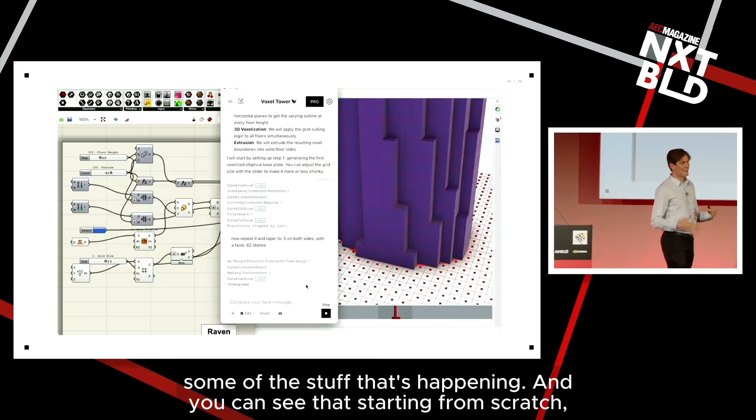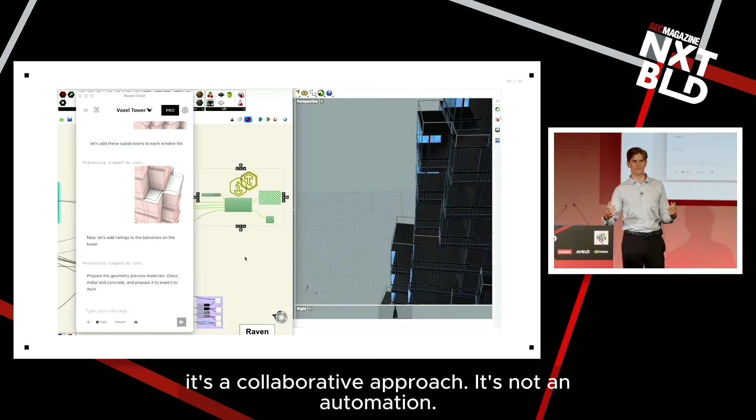We saw it earlier in the presentation that Bentley did. But here I have the same video again, just a little bit slower so we can look at some of the stuff that's happening. You can see that starting from scratch, you can create a Grasshopper model and then have that sketch and your prompting be in context as you develop this parametric model together with Raven. So it's a collaborative approach, not an automation. That's what Raven does.

And then you can push it, for example, to Bentley. Raven is your AI system for Grasshopper and Rhino, because we think that the tools that we've been building for 20 years are valuable. They have a lot of knowledge built into them. They already perform all of the actions that you need them to do. And what you need is to bring them all together, solve the interfaces, and deploy AI that's native across that suite instead of rebuilding something from scratch.

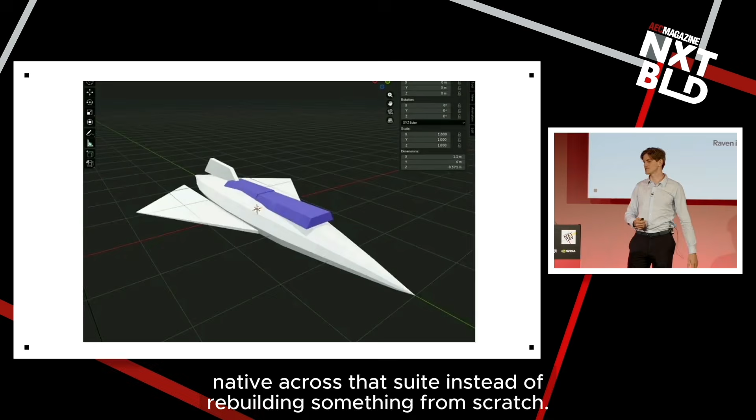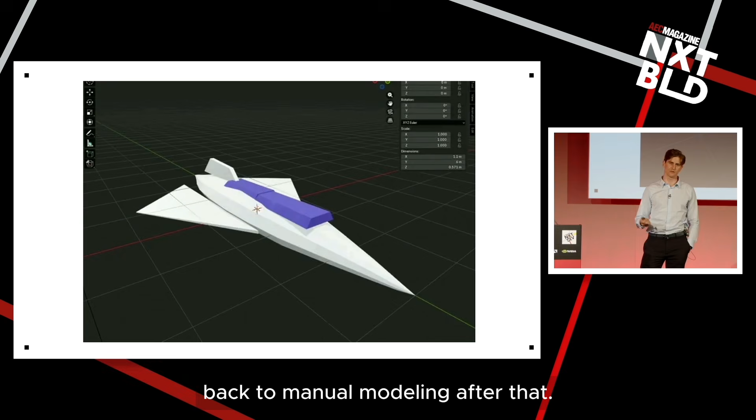Also, instead of doing something like an MCP that throws some blocks into your CAD, like a Rhino file—if you build a Rhino file with an MCP, you have sort of loose objects and you're back to manual modeling after that. One of the things that we really love about the Grasshopper platform that makes it attractive, even if you are not currently a parametric designer, is the structure that it brings into CAD models.

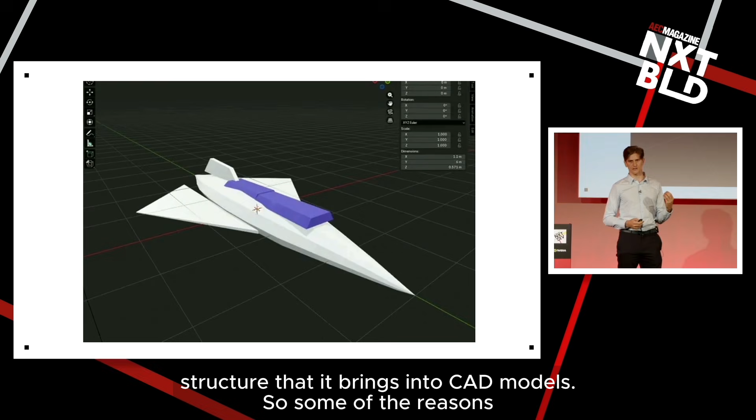So some of the reasons why it's a good idea to build on top of the existing systems is that you can use a lot of the things that they already bring. The node-based structure of Grasshopper is actually the perfect way to author a 3D model for AI, because the node abstracts away all sorts of functions. You can make a CAD model, you can have a simulation in there, you can call foreign APIs, and at the same time, they all work through inputs and outputs, and they are very well structured.

So if you build a model using Raven and Grasshopper, you get a structured 3D model that can still be just as complex as your normal Rhino model, but it's actually way easier to collaborate on with an AI model to fix things. If you have an MCP build you a building and you want to take out a floor, you're back to a manual edit, and in Grasshopper, it's one little slider move. So this very thoroughly structured data, the thing that makes Grasshopper a pain to use or to learn, is exactly the right place to be if you want to work with an AI model.

And of course, you can abstract away complexity. You can have different levels to navigate through the graph. So working on big Grasshopper graphs is actually really good for models and for humans to collaborate on.

The thing is, if you don't rebuild the entire CAD suite, it comes with way more depth. So instead of just giving you an early stage design tool with AI, we can give you an AI tool that can do all of the things that you were doing already anyway. So you can build geometry with Raven in Rhino, but you can also run your analysis tools and connect it to all the other things that already exist. So you are not stuck in a shallow AI CAD suite, but you really get the full depth of the McNeel ecosystem.

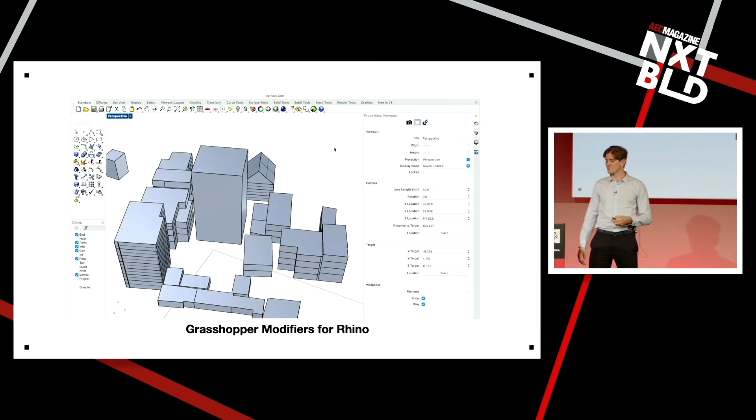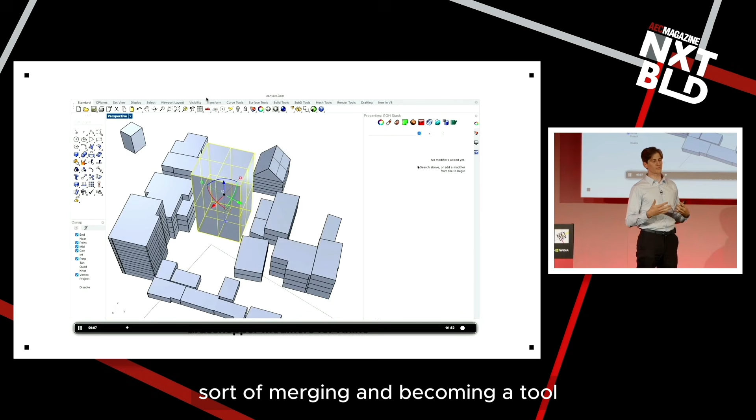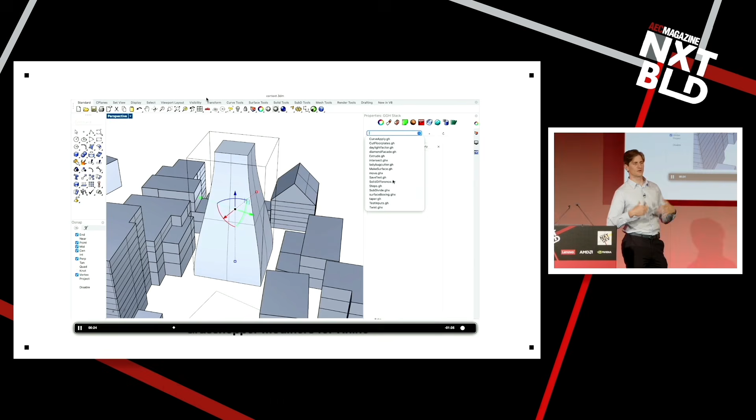This is an open source project, but it's pointing towards a direction where we see AI and design sort of merging, becoming a tool where you can have direct interaction with your CAD model here, and then you can apply a bit of logic to it. In this case, it's just a taper. But then you can take that taper and you can add another script that cuts it into floor plates. You can have Raven write complex scripts in the background, let you interact with the entire suite of Grasshopper plugins while you are sitting in Rhino with direct interaction on the tools that you already know.

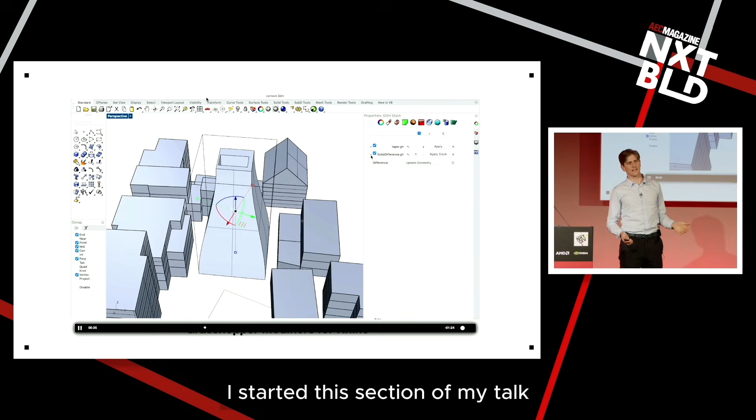I started this section of my talk talking about how do we bring design tools to designers that are like AI native.

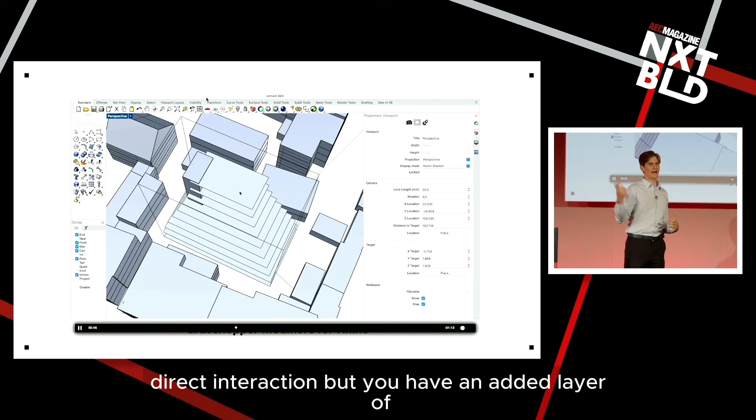And we really think that this way, where you get easy direct interaction, but you have an added layer that gives you basically access to the entire world of coding and plugins and so on, bringing that right into the UI that you're familiar with, into the files that you already have.

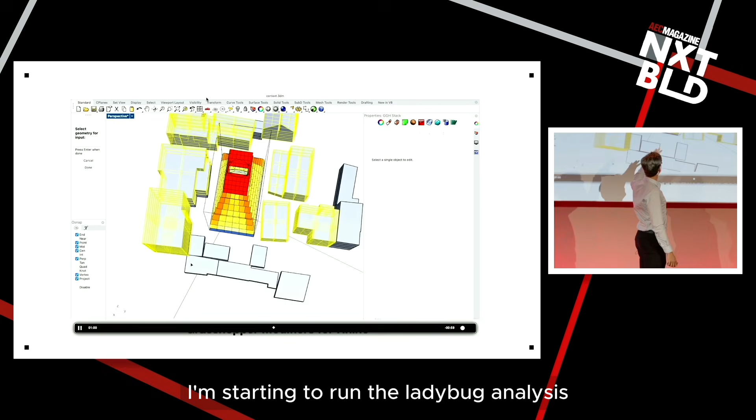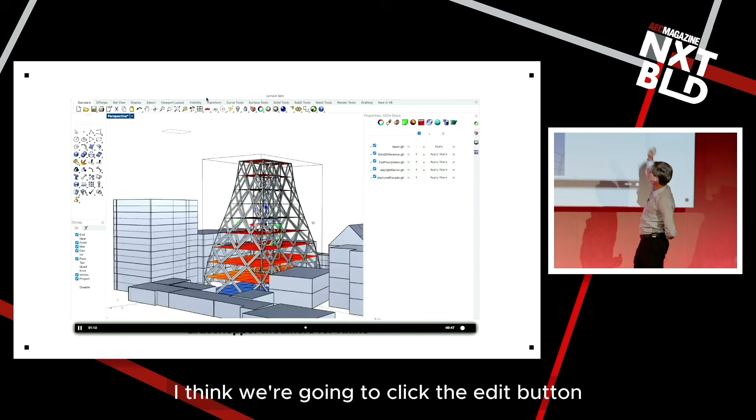Here you can see now I'm starting to run a Ladybug analysis based on the context, cutting it into floor plates, and everything still just exposes the simple UI. Now, just in a moment, we're going to click the edit button, and that will open up the Grasshopper file that is behind this. So this all still runs native Grasshopper. It's just a different kind of interaction for that native Grasshopper.

And if you click on edit, it will open up a Grasshopper file, and you're back to your ground truth, right? The tools that you already trust. So this is how we think the future of design will look like. You're grounded in the tools that you know. You can draw from all these different parts, right?

Everything is sort of an interconnected world that is not on a linear scale where you export at the end of your process, but instead you can draw from the previous scripts that you have, run analysis, interact with autonomous agents, and they really center you as a designer within all of that context. You're not waiting to hand off your model to run a simulation and then never look at the results again, but instead in the design process you can bring all of that in way earlier and keep it interconnected. And these hand-offs are kind of falling away.

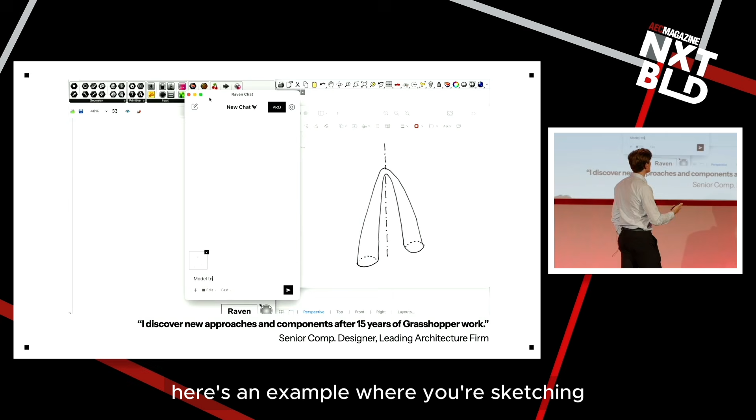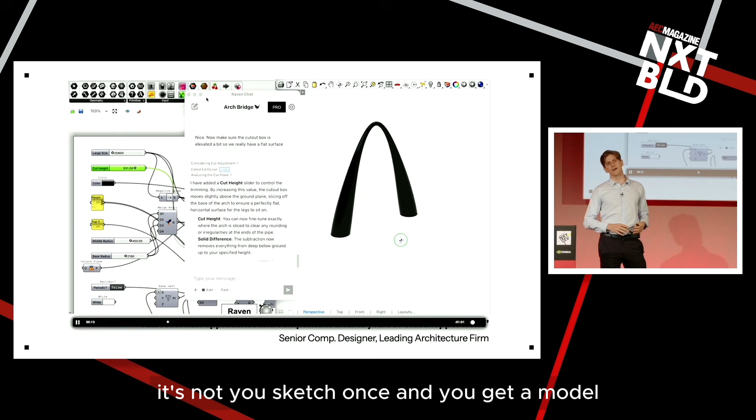So what does that look like? Here's an example where you're sketching and then iterating alongside the AI model to make a bridge model. And the reason why I like this example is it's not that you sketch once and get a model. It's also not that you prompt once and get a model, or you get a result the AI made and then try ten rounds to get rid of this one little thing you didn't like.

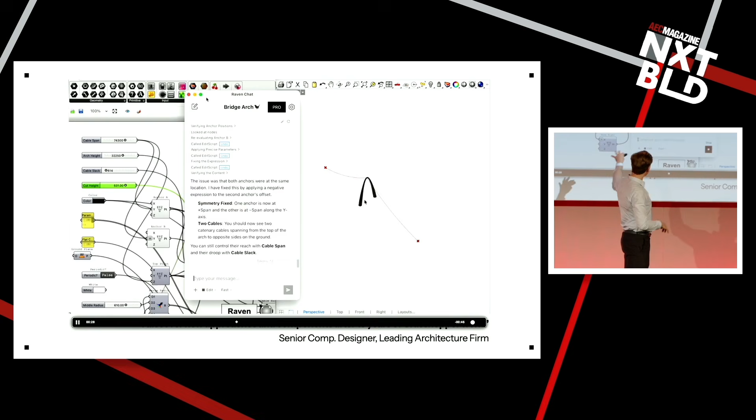But instead, it's really interactive. You can sketch, you can prompt, and you can go in and change the sliders yourself or add graphical components and logic that you know you want. So it's a really fully fledged interaction between you and the model, getting to the point that you're trying to go to. It's not about one-prompt automation, right? It's about this iterative process that can be way faster and way better informed early on.

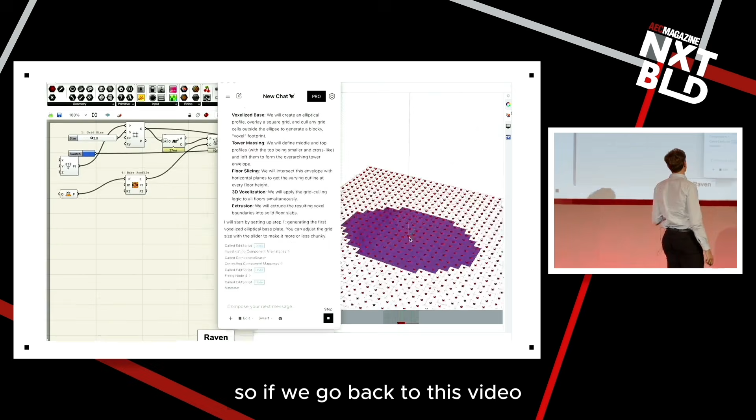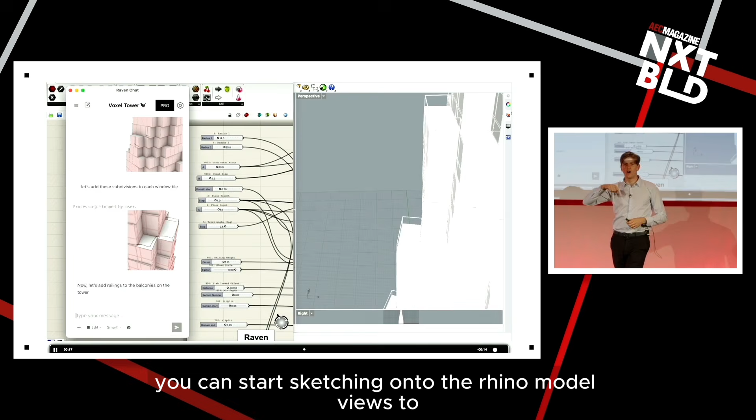Okay, very cool. So we have design tools. They center the designer, they let you really explore and have a lot of context early on in the design process. But how do you make them reliable?

Well, the reason why you can make reliable tools with AI is because you don't just rely on the AI model. Instead, you rely on the tools, like the Rhino CAD kernel, that actually execute the plan, right? Which means in our case we can run any kind of simulation software you already use. We can rely on all the software you already have and just have the AI act on top of it, which means the things you're trusting are the same tools as before. You're just chaining them together and operating across them faster.

And by all the tools you already use, I mean all the tools that you already use. So through the Rhino Grasshopper platform, Raven can already connect you to tools like Ladybug Tools and Karamba for structural analysis, but also Rhino Inside Revit, right? Rhino Inside Revit, you might already use that as this one-way piping to bring things you build in Rhino into Revit, but with Raven, it becomes way easier to use and sort of natural, part of this entire workflow. So as we're sketching out this building from earlier, we can already bring that into Revit, into a native BIM model, all within the Grasshopper canvas.

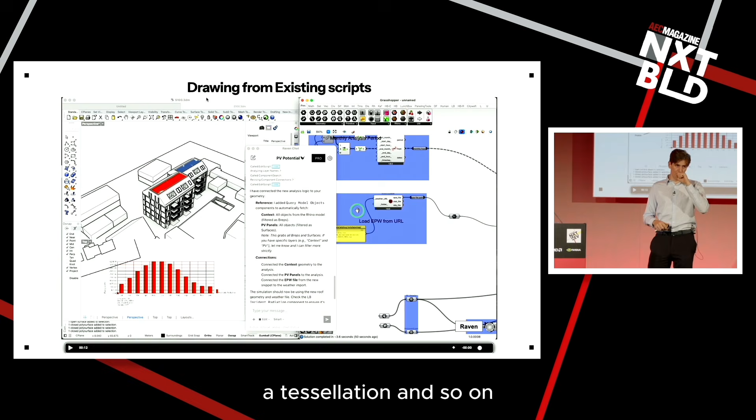Another thing, the compounding knowledge that we spoke about this morning is drawing from past scripts. How many times have you guys or someone on your team done sunlight analysis, done a tessellation and so on, and then you never use those scripts again because they're in Grasshopper or because nobody can understand them or you don't know where they are? We are really betting big on this shared hub of knowledge that AI agents can interoperate in, draw from, and really compound also for your firm.

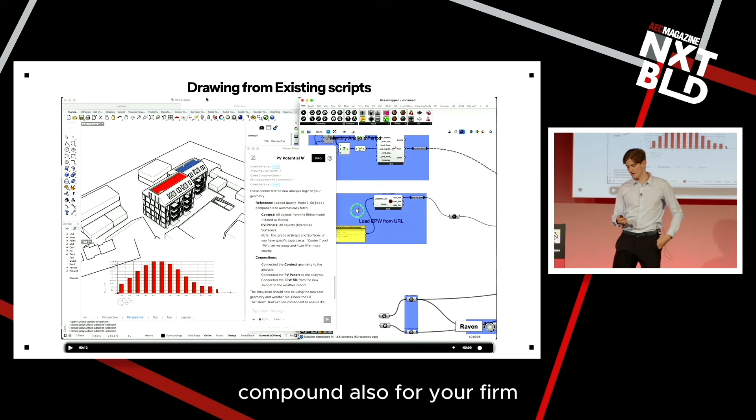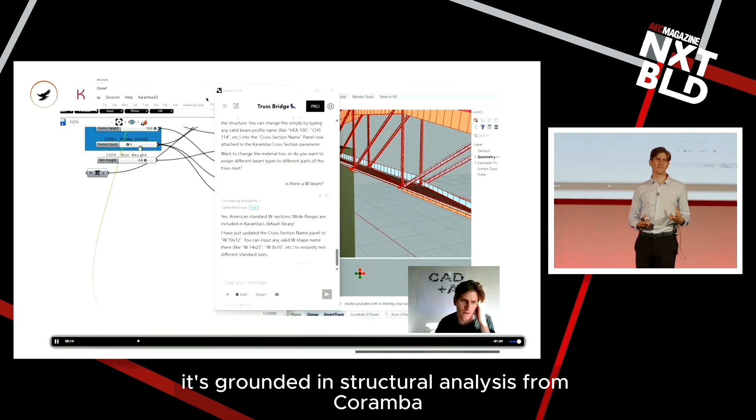Here I have a couple of examples of the things that Raven can connect to already. Here, for example, you have a Karamba script. Raven natively understands Karamba. It can switch out the beams, run simulations. It's grounded in structural analysis from Karamba when it talks to you about the model, right? It's not hallucinating this stuff. And you can see where the information comes from because it's all in your Grasshopper file. There's no black box. There's no hidden things.

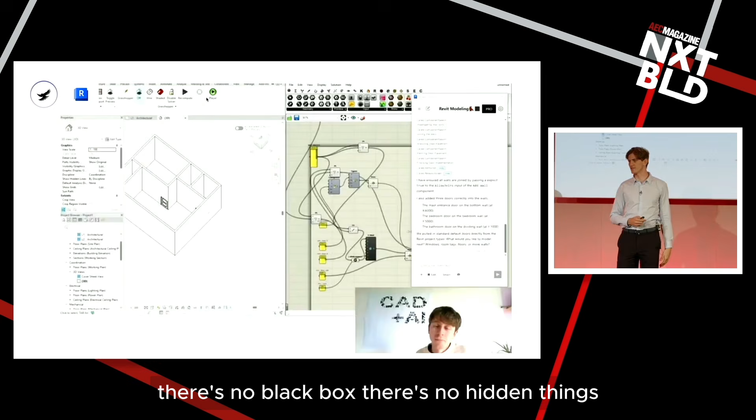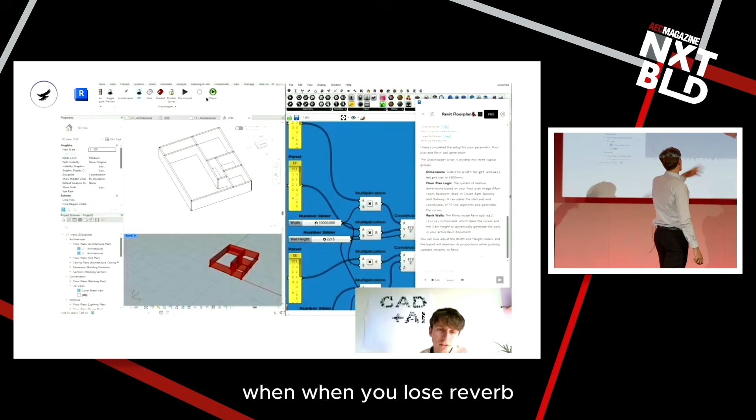Same with Revit, of course. Rhino Inside, a super incredible development by McNeel that lets you control Revit out of Grasshopper. When you use Raven, and here in this case Vibe CAD, a simple building, it's a parametric building. You're not stuck with some family that's off. You have a workflow that is auditable, and you can go in and change any part of it. And we really, really think that that's the future for AI systems like this.

Same is also true for ArchiCAD. I saw that they were here, so I thought I would include this.

It'll become a place where, as you're designing, you're running a simulation, you're getting information back, you can get BIM models out and so on, and it will become an interactive canvas that's way more circular than it is today, and these handoffs discontinue. So it's up to you which path you choose.

It's a really important moment for you to act. I don't think you should sit back and basically watch a show, because we're already working with a lot of leading firms that are developing these new systems, how they interact with their data, how you draw from them, how you get to that compounding knowledge moment. And if you want to shape that future, you have to step up now and interact with it.

And I think you should be interacting with the open and interoperable ecosystems of this world and not the closed off ones. And that's what we call the Rebel Alliance. So we think of Rhino and Grasshopper as this world of specialists that solve specific things that are all interoperable. They're all on the Grasshopper canvas. And it's a great place for you to come and bring your resources, your knowledge, your feedback into this ecosystem, because this is the kind of AI future that will enable a much better workflow for everybody instead of closing it off behind closed doors.